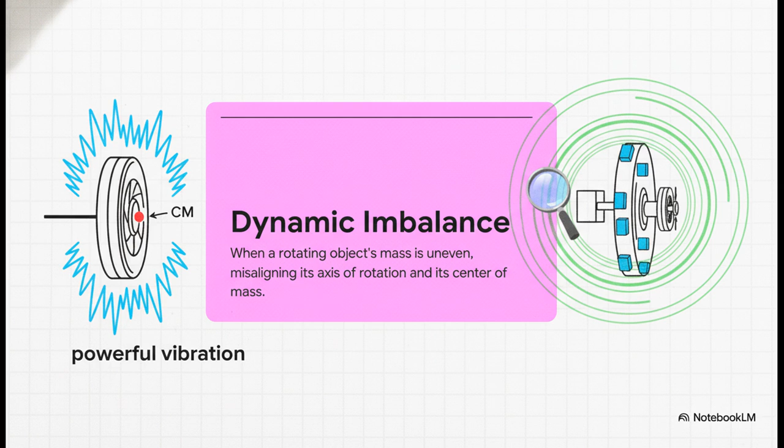As soon as that object starts spinning, that extra weight wants to fly outwards, creating this powerful, rhythmic vibration that can literally tear a machine apart. So the whole goal of balancing is to nudge that center of mass right back where it belongs, right on the axis, and make the vibration disappear. To pull this off, engineers basically have two main philosophies.

The first one, let's call it the builder's approach. It's super intuitive. If one side is too heavy, you just add a little bit of weight to the opposite side to even things out. Simple, right? And they do this in some pretty clever ways. Just think about your car's tires. See those little metal blocks clipped onto the rim? That's it. That is dynamic balancing by adding mass.

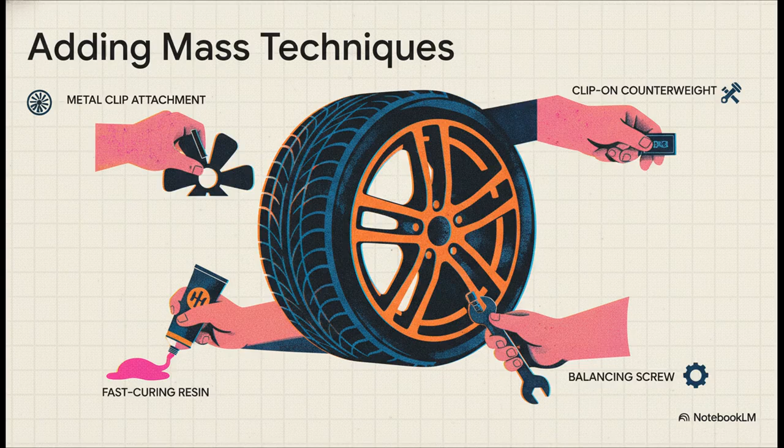In other cases, engineers might actually bolt or weld on counterweights, use special little balancing screws, or for really fine-tuned jobs, they might even apply a dab of special putty that hardens really fast. It's all about building up the light side to match the heavy side. Now, the huge advantage of this builder's method is that it's forgiving. It's got an undo button.

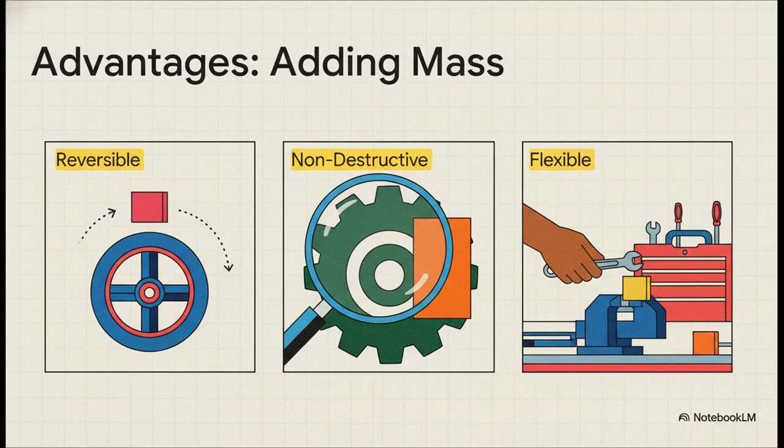If you add a little too much weight or you put it in the wrong spot, no big deal. You can just take it off and try again. And most importantly, you haven't permanently damaged the original part, which makes it perfect for making adjustments out in the field. But, and this is a really big but, there's a serious catch.

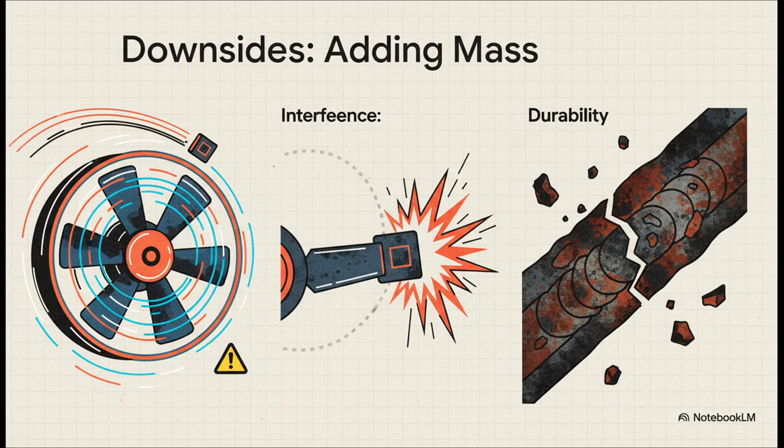At really high speeds, that little counterweight becomes a tiny projectile. If it's not secured perfectly, it can fly off with a ton of force and cause catastrophic damage. Not only that, but these added parts can sometimes get in the way of airflow, like in a fan, or they can just fall off over time thanks to corrosion or vibrations.

And that brings us to the second philosophy, which is the complete opposite. Let's call this one the sculptor's approach. Instead of adding to the light side, you carefully carve away material from the heavy side. The tools for this are way more precise.

We're talking about drilling holes to an exact depth, milling away just a paper-thin layer of metal, or punching out little bits of material. It's a subtractive process, kind of like a sculptor chipping away at a block of marble to reveal the perfect shape hiding inside. The beauty of this method is its permanence.

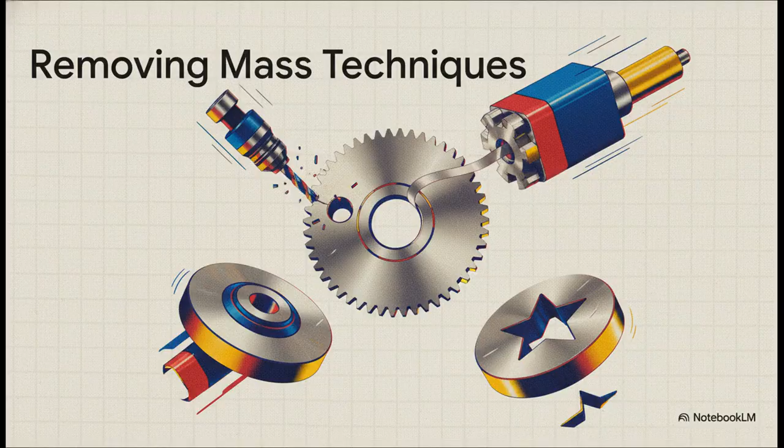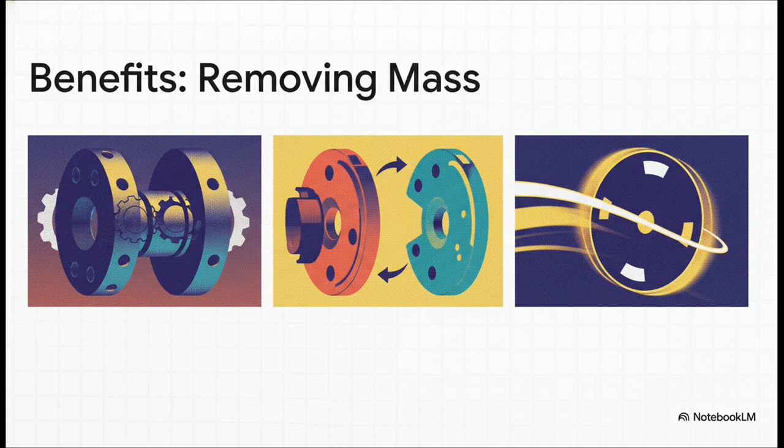Once you've drilled that hole, that mass is gone forever. There is absolutely nothing that can fall off, nothing to corrode, and nothing to block the airflow. What you get is a clean, compact, and incredibly stable solution. It's pretty much perfect for things that spin at insane speeds.

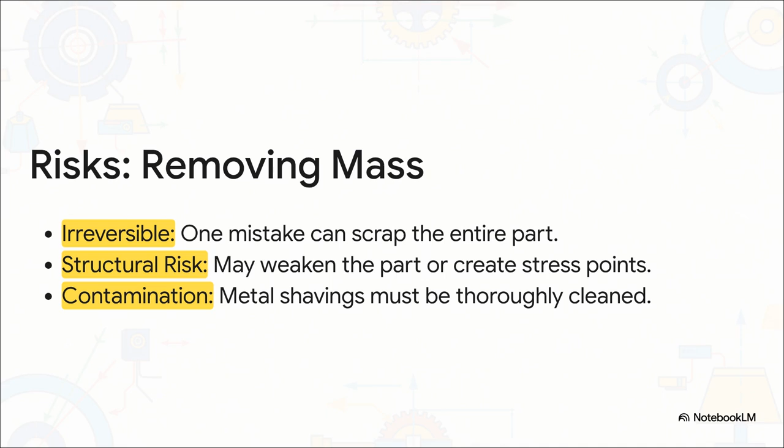But the flip side, of course, is that it's incredibly high stakes. There are no do-overs here. If you drill too deep or you drill in the wrong spot, you can't just put the metal back. You might have just turned a very expensive, very complex part into a piece of scrap metal. And even worse, you could accidentally weaken the component, creating a hidden stress point that could fail later on.

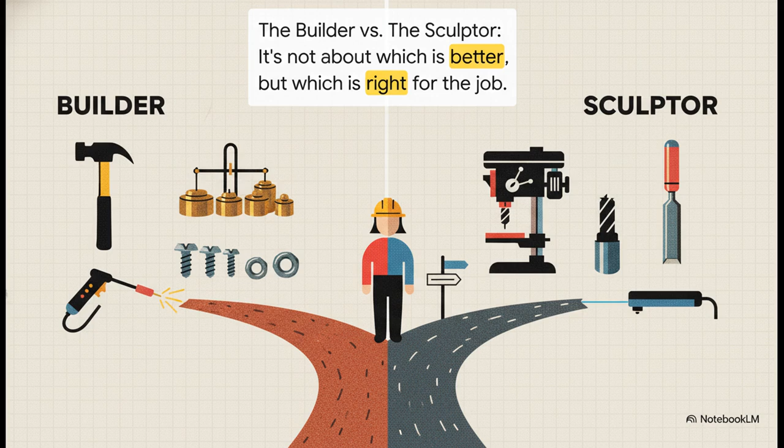So we have two completely different ways of thinking: the flexible builder versus the permanent sculptor. So which one is actually better? Which one wins? Well, the truth is, it's not really about one being better than the other. It's all about using the right tool for the right job. So let's see how they really stack up. When you put them side by side, the trade-offs become super clear.

If you want pure, rock-solid stability, the sculptor's method wins, hands down, because it's permanent. But if preserving the original part's strength is your top priority, the builder's approach is much safer. And for precision, well, drilling lets you make unbelievably tiny adjustments, whereas adding mass is kind of limited by the size of the weights you have available.

That's why you see them in different applications. Adding mass is great for everyday stuff like tires and fans. Removing it is essential for high-performance parts like motor rotors and crankshafts. You're basically trading flexibility for permanence.

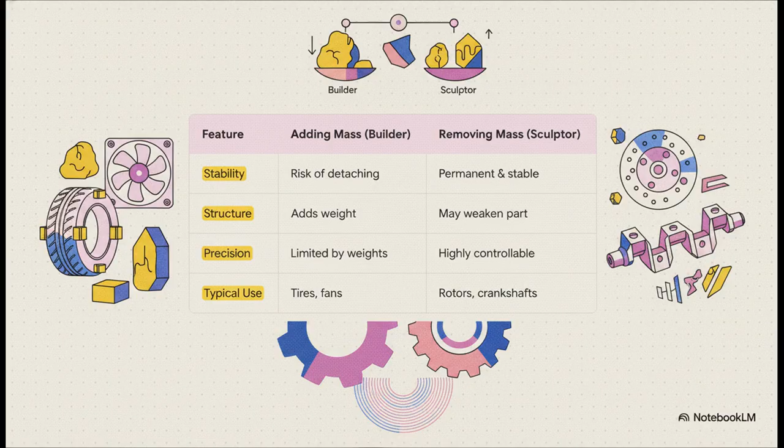So, here's the key. Engineers don't just pick a favorite method out of a hat. They follow a really logical process that's all about the context of the part they're working with. They pretty much run through a mental checklist. First up, is this a one-off part or are we making millions of them? If it's mass-produced, automated drilling is way faster. Next, is the part fragile? If so, adding weight is safer than risking damage.

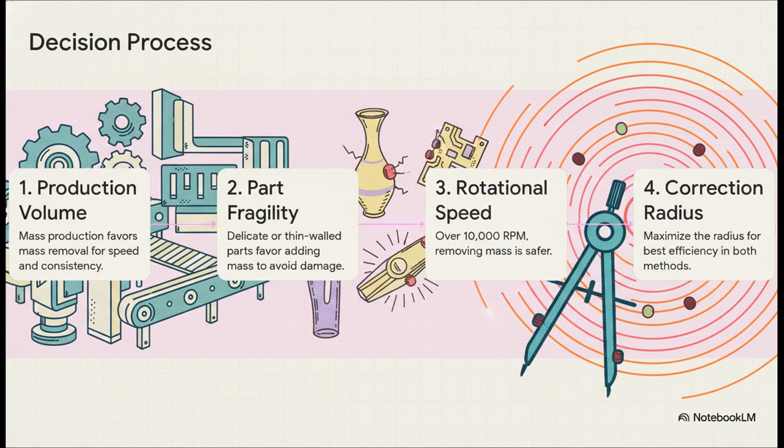And a huge one, how fast is this thing gonna spin? Once you get above 10,000 RPM, the risk of a weight flying off is just too great, so removing mass becomes pretty much the only safe choice. But that last point, maximizing the radius, that is so important, it's basically the universal law of balancing. And that brings us to the golden rule. It's this one single principle of physics that applies whether you're adding or removing mass, and it is the absolute key to doing it efficiently.

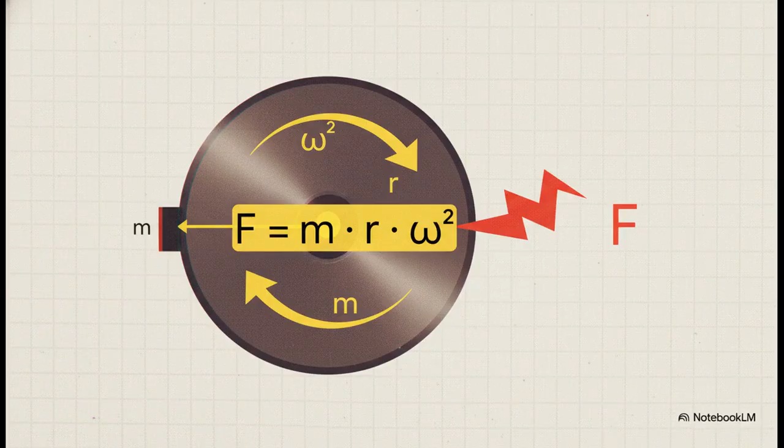It all comes down to this formula for centrifugal force, F = m·r·ω². Now, don't worry, it's simpler than it looks. That shaking force, F, that's what we're trying to get rid of. It's calculated by multiplying m, the mass of our correction, by r, the radius, which is just how far from the center we make the correction, and omega squared, which is just the rotational speed. Now, engineers can't change the speed, but they have total control over the mass, m, and most importantly, that radius, r. And here is the simple, powerful takeaway from all of this.

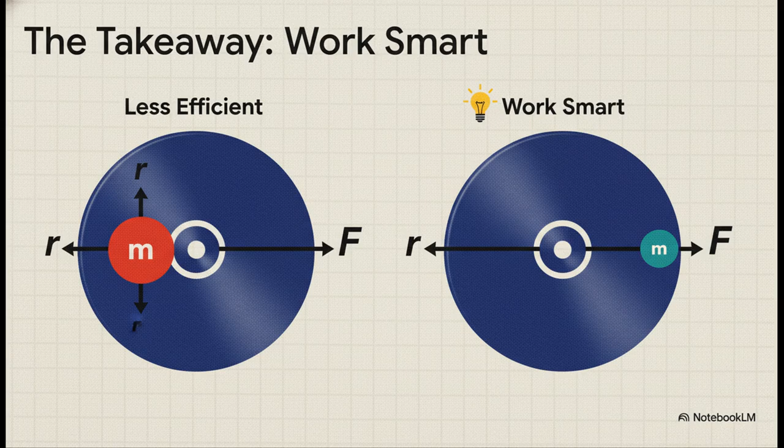Because that radius, r, is a direct multiplier in the equation, the farther you move from the center, the more powerful your correction becomes. This means you can use way less mass to get the exact same balancing effect. Working at the outer edge isn't just a good idea, it's always the smartest move. It's more efficient, it's less invasive, and it creates a much more stable and reliable part in the end.

So, the next time you see a perfectly smooth running engine or just a quiet ceiling fan, you'll know it's not magic. It's a very deliberate choice between building and sculpting, and it's all governed by a simple, elegant rule of physics. It kind of makes you wonder, doesn't it? What other invisible engineering is out there, just quietly making our world work?